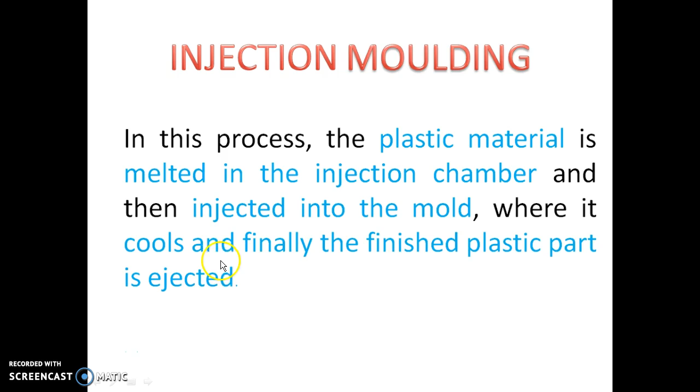Injection molding is a process in which the plastic material is melted in the injection chamber and then injected into the mold, where it cools, and finally the finished plastic part is ejected.

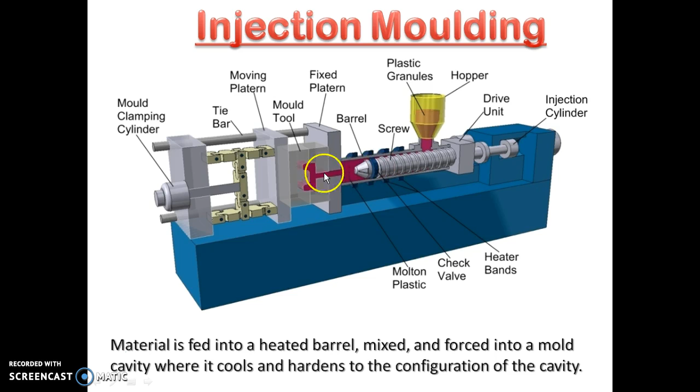Now we will see the working principle of the injection molding machine. Here is the mold cavity, this is the injection section, and this is called the clamping section. First, the clamping is done.

After that, in the hopper we take the plastic granules, and these are the heaters. The plastic granules are heated and melted here, and then fed through the reciprocating screw to the molding cavity. When the part is cooled, then it is ejected.

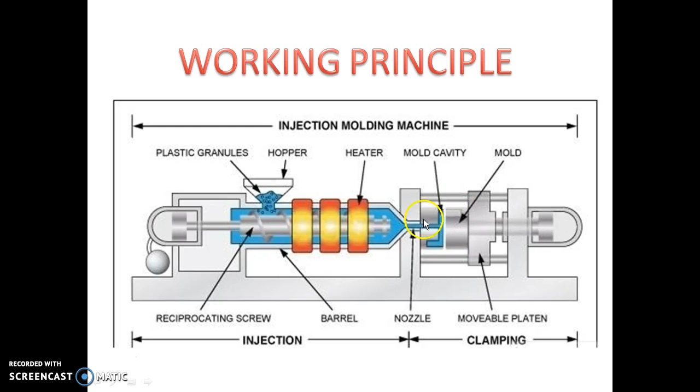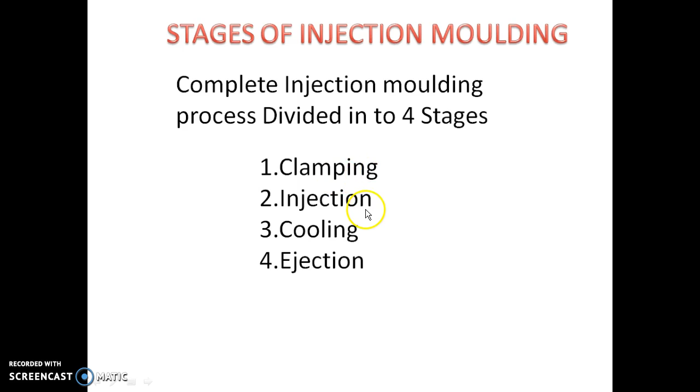Now we will see the stages of injection molding. The complete injection molding process is divided into 4 stages. The first is clamping, the second is injection, the third is cooling, and the fourth is ejection.

First is clamping. In this, the two halves of the mold must be tightly closed, before the molten plastic material is injected into the mold. Once one half of the mold is attached to the injection unit, the other half slides on the guideways. The clamping of the mold is operated hydraulically, which pushes the moving part of the mold towards the fixed part to make an airtight chamber. The force and time required to close and open the mold depends upon the machine capability.

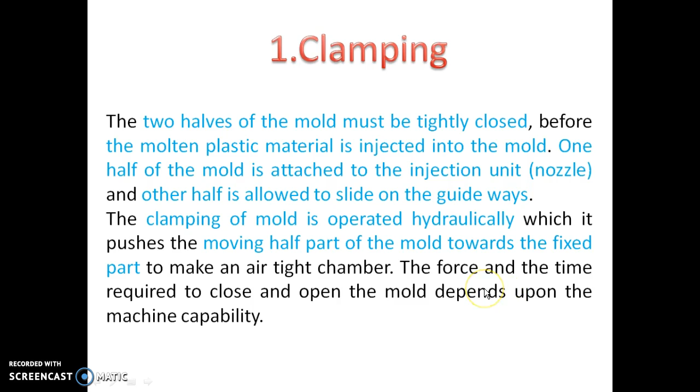The second process is injection. In this process, because of the heat, the material is melted and forwarded through the piston towards the nozzle and finally into the mold. Then the molten plastic is injected into the mold cavity quickly.

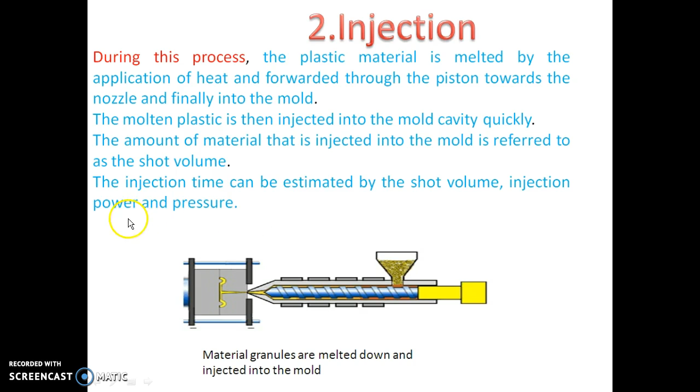We will see the shot volume. What does shot volume mean? The amount of material injected into the mold is referred to as the shot volume. It can be estimated from the injection power and pressure, and the injection time is estimated from the shot volume and the injection power and pressure.

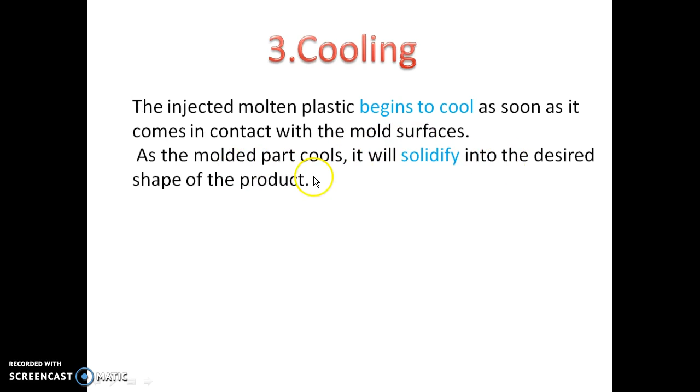Now the third stage is cooling. After injection, it begins to cool. As soon as it comes into contact with the mold surfaces, the molded part cools and solidifies into the desired shape of the product.

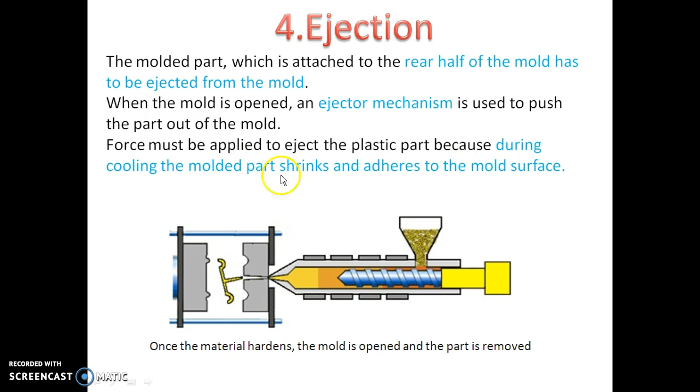Next, the final stage is the ejection process. Here the rear half of the mold has to be opened. When the mold is opened, the ejector mechanism is used to push the part out of the mold. Force must be applied to eject the plastic part because during cooling, the molded part shrinks and adheres to the mold surface. This process takes 2 to 60 seconds.

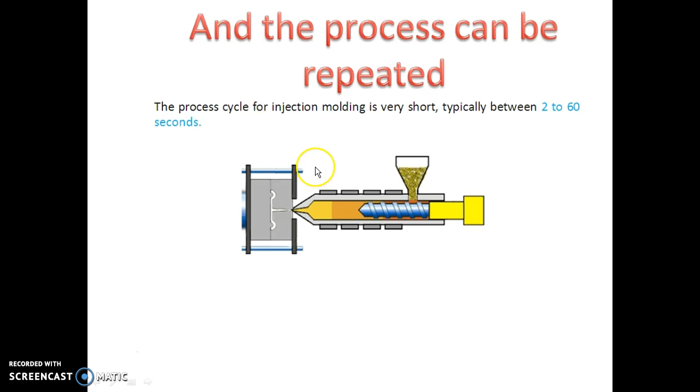After that, the process is repeated, meaning the 4 stages are repeated.

These are the materials used for the injection molding process.

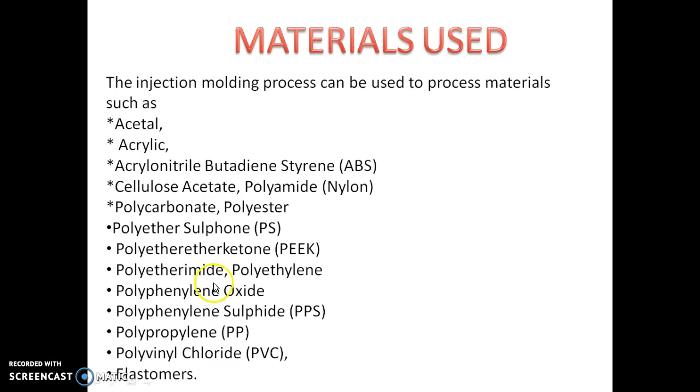Now we will see the applications of the injection molding process. Generally, these are used for thin walled plastic housing products and household appliances, electronics, and open containers like buckets and toothbrushes, small plastic toys, and medical devices including valves. Essentially, all of these can use the injection molding process.

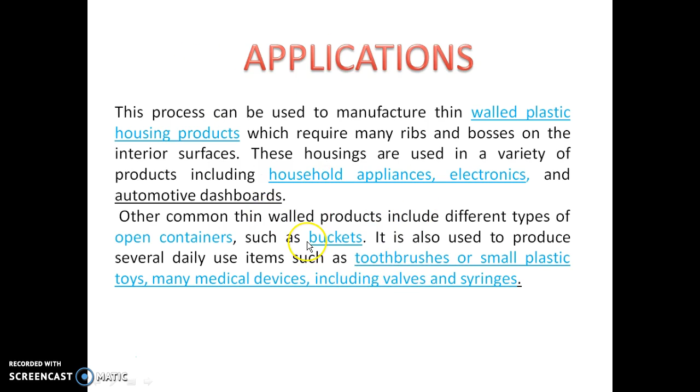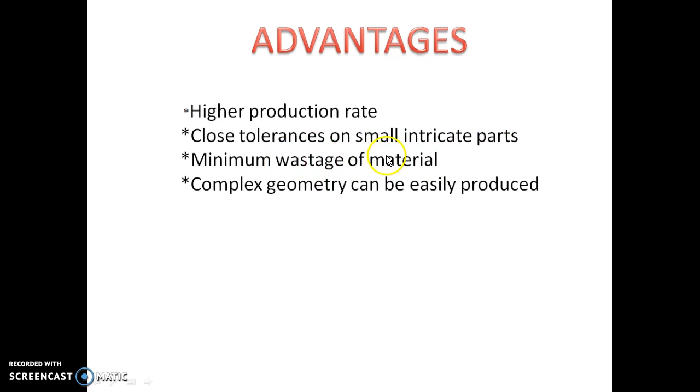Now what are the advantages? The production rate is high, close tolerances can be achieved on small intricate parts, there is minimum wastage of raw material, and complex geometry can be easily produced.

The disadvantages are that the initial tool cost is high, the setup cost is also high, and large undercuts cannot be formed.

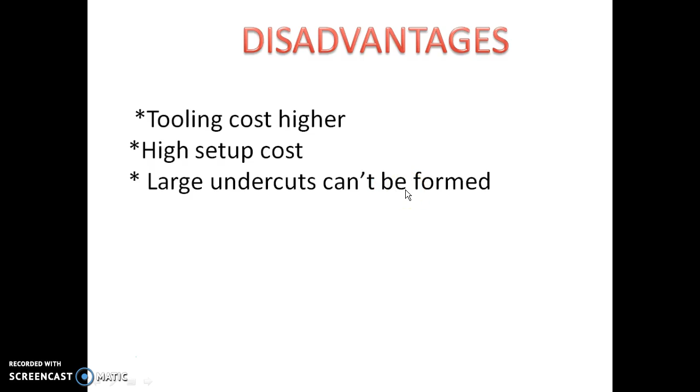Next, the important process parameters. These are injection temperature, pressure, and shot volume, mold temperature, cooling time, ejection temperature, and cycle time.